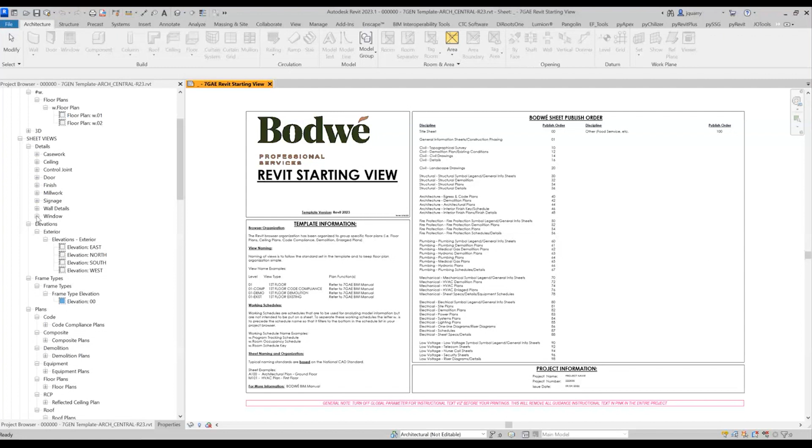A lot of these meetings are going to be based on what you guys want to see too. I don't want to sit up here and just monotonely dictate everything I'm trying to show you. I want you guys to interact, so if you have any questions, please jump in and ask.

I was just going to comment on that. Not you, Rick, though. Go ahead. I was just going to compliment you on how great this cover sheet looks. Well, then absolutely, please, take it back, Rick. He said he didn't want it. No, I'm serious, this already looks like a step in the right direction.

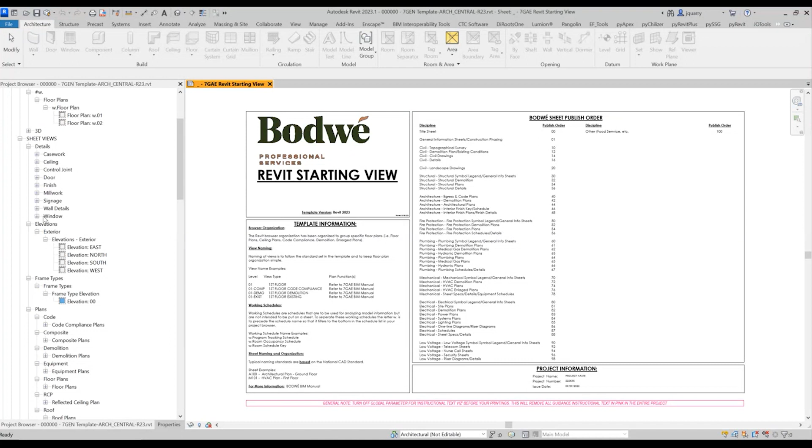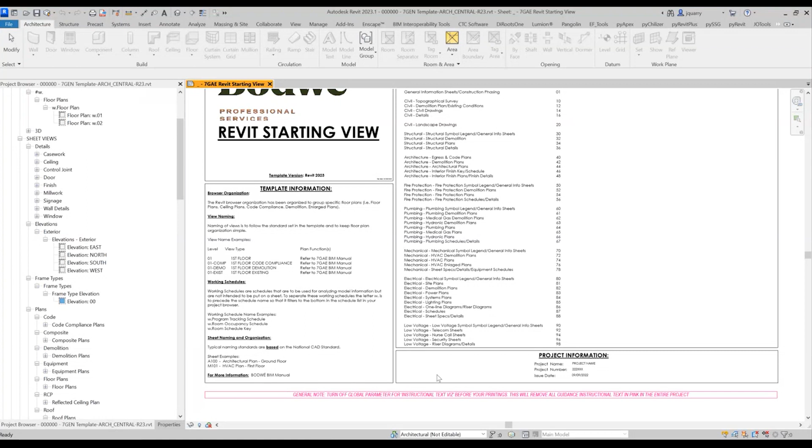Yeah, and this is a little bit of what we had before, just tweaked a little bit. You'll probably notice, Rick and everybody else, some of these pink instructional texts that I've tried to place throughout, and I'll continue to place throughout, to help people know what we're doing with what and where, to help facilitate that until you understand our process and how to achieve the graphic we're looking for. That comes in a little bit later, actually.

The global parameters, I can show everyone that. The preliminary stamp for the title blocks are also tied to that. So, you want to just pause for a second? Sure. Any questions? We don't have anything online yet, but anything from anybody?

So you'll see when you first get in here, some of you may have done this, some may not have noticed. There is what's called a browser organization. And if you right click any of these headers, which are listed as views, schedules, and sheets, you have this ability. You'll see in this project browser that you can actually edit these and control how it's sorting and displaying in the project browser.

The one thing I recommend is create your own if you need to help yourself move around. There's plenty of parameters here you can choose from to filter by, but please don't change the default one. This one is 7Gen, please don't change that. If you have to, create a new one, duplicate it, whatever you need to do, but that'll give you different looks.

What I mean by that is, let's say I'll pick this phase. I have no idea what's even in here, this was already in there before, but if I apply it, you'll see what it did is it changed how it's organized over here. This can be a very powerful tool to help you find what you're looking for as well. Recommendation: try to get used to this one, because it's going to be the default in every single project.

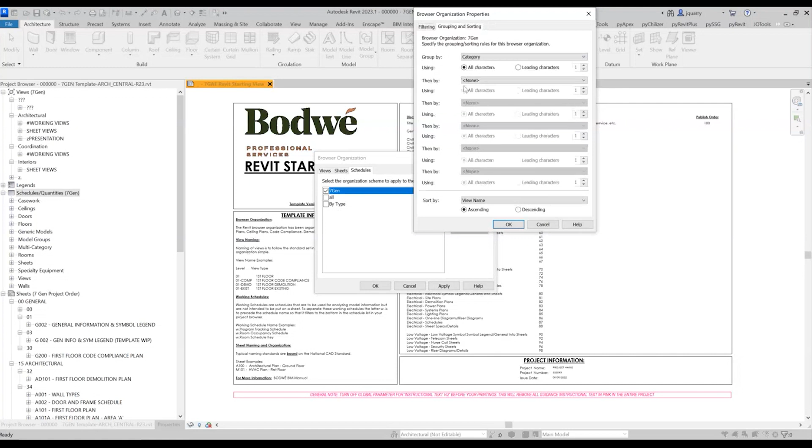So there's one for views, there's one for schedules. Notice there isn't one for legends. Rumor has it they may be bringing that at some point, but I don't know that for sure. But there are several settings you can do. You just right click it, go to project browser, sheets, your schedules, edit whatever one you want, go to the sorting and grouping, change however you want to do it, play around with it, create your own, have fun.

So that is the browser organization.

The other bigger part of this is you'll notice this working view and sheet view thing. Over the years I've implemented this in several firms, and it's always an issue to think of at first because nobody really thinks of it this way. But working views and sheet views, a brief history, are something that was necessary when Revit first started because they didn't have view templates.

So in order to keep drawing views safe—if people went in and changed doors to blue, turned off kitchen equipment, made all the walls hatched purple or whatever, just so they could see things a little easier—they would forget to go back and undo that. There wasn't a quick way to do that. So when it came to print time, they would go to print, and all that stuff would be purple and pink and all that good stuff, which is never good. So when view templates came around, it made these a little less necessary.

However, there are tools in here that allow us to temporarily turn things on and off, which is really nice—I use it on a daily basis. I'll do one of these focus trainings on that in the future. But I still like to use working views versus sheet views, so that way I know which ones I really shouldn't go in and mess with.

And if I know there's a set for sheet views, I know those views should be on a sheet. My working views are just views that I can do anything I want with the graphics. That's the only difference—they're the same as any other floor plan view. For instance, I can change the settings and graphic settings, and I don't have to hurt any of the plans as I'm doing it.

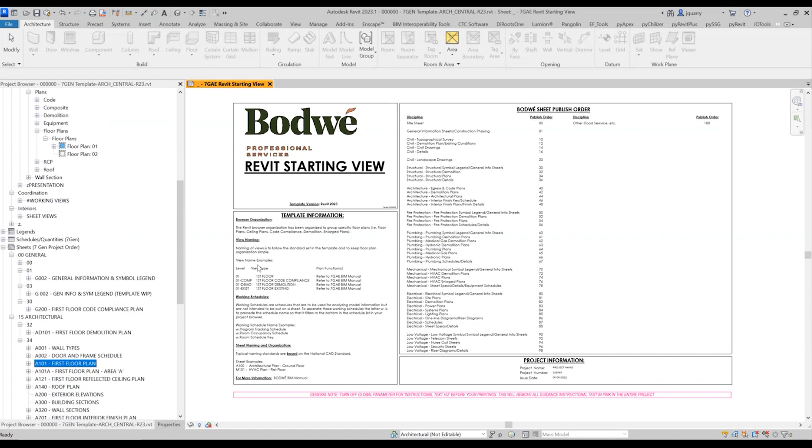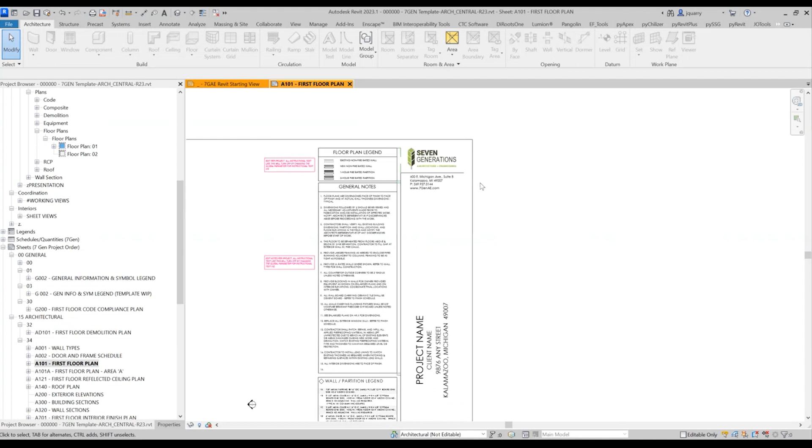So, moving on to the next one, sheet organization. Some of you have seen some of this already and have pulled out your hair, been extremely happy with it, all the above, right? I just wanted to point out a couple of things that have changed from a graphic points of view. For one, any of the sheets you see here in the project browser have been created already and had legends and notes already placed.

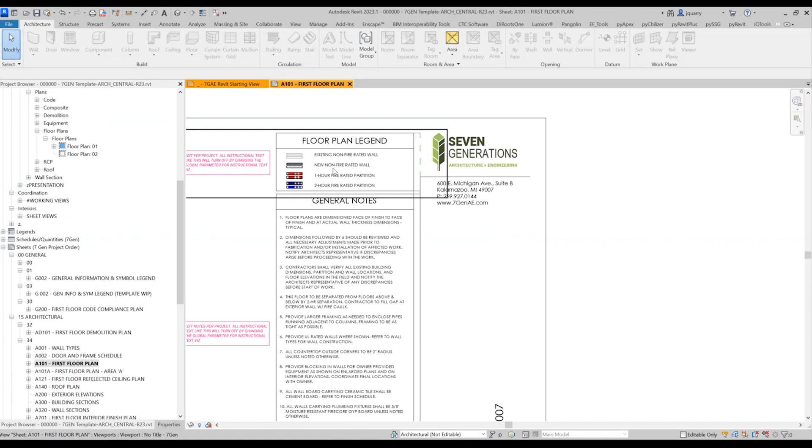And I'm in the process, and I haven't finished this all, but I'm also putting in some reference planes. The reason I'm doing that is it's going to allow you to quickly place another legend, not necessarily from one plan to another, but I know if I bring this guy in, I know this point goes right there, and now it's put in the exact space where it should be.

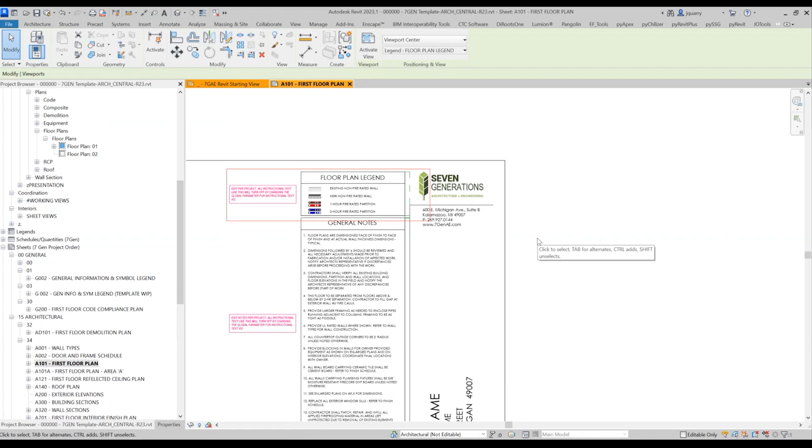And for awareness, those reference planes are set up to not print. Don't delete them, just place it on your sheet and keep moving. And if you don't want to see them, you can double click in it and hit VV, visibility graphics, and turn them off. If they're bugging you, I can turn off both of those and you'll see they'll go away, but they won't print.

Jason, does that change the setting for you specifically, or for everyone in the model? Everyone in the model. Yep, that's a view type visibility graphic, so whenever you hit the VV or the VG, you're affecting that view for everyone. If you work on a view template, same thing goes, you're working on that for everyone. So that's why you want to be careful with the new ones.

As you mentioned, we'll do a focus training on temporary views versus turning things on and off in the view template. Ideally, you're never doing that - it's set up to print exactly how we want things to look. I'd say if you're not comfortable using the temp tools, turn off the view template, turn it back on. But working with Jason and going through the temp views has worked great for me.

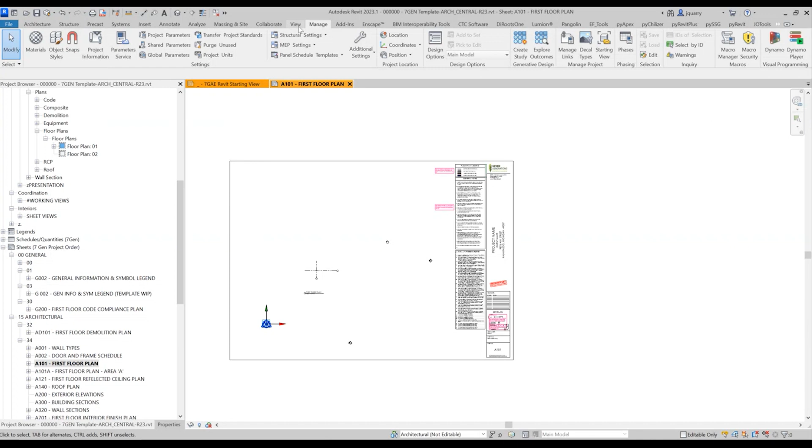All right, so the next thing, the view templates, I want to show you guys how those have changed, at least from a naming standpoint. Let's see if I can find them here. View templates, manage. So you'll notice it's quite a bit shorter list.

Doesn't mean we can't add. Doesn't mean we're okay with everything that's there. I can definitely guarantee not all the line weights have been gone through yet. It's a process, so it'll take some time to get through that, but I'm working diligently on that. But these are pretty self-explanatory.

I mean, building sections, it's going to put your building section graphics where they should be. It's going to turn things on and off the way they should, with a huge caveat of links - that's a whole separate topic. But it will set everything up, at least from a benchmark standpoint.

The other thing it does is it also places any new views you create in the proper location over here in your project browser. So that's super important. You'll also notice when we look at the drawing sheet list, it'll do that with your sheets, your placeholders as well. So there's no more guessing as to where did that go. You know exactly where it's going to go, once you get used to it, I should say.

So the view templates are a big deal, very important. And feel free to add some to them.

I would highly suggest you put your initials in front of a view if it's a working one. I like to use W dot. You might see some of these in here—ones I've created over the years to help with applying view templates and temporary view settings, so I can quickly look at something and then turn it off. They become very helpful in that regard.

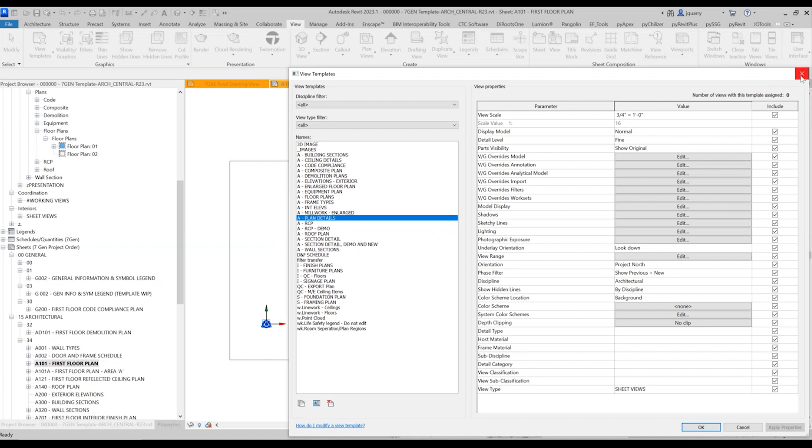Again, we'll deep dive into that a little bit further later.

All right, the next thing I have is publish order numbering. This is a good one. I went through and looked through this list, made a lot of sense. The publish order, even though I haven't used it in the past the way we use it now, it does make sense, and I used a very similar approach previously with prior employers.

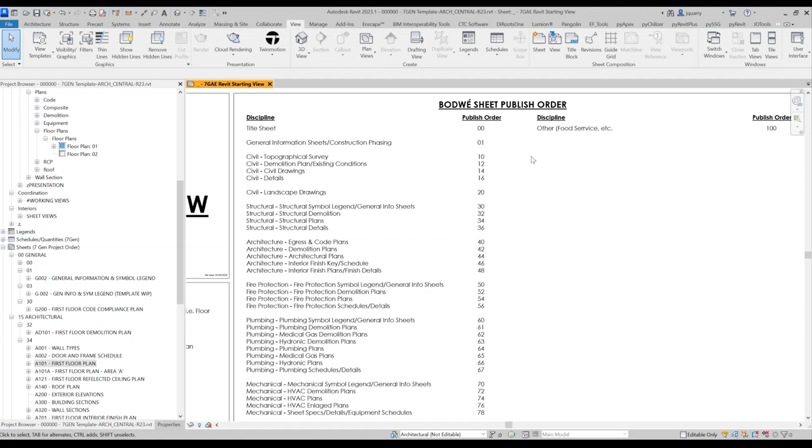But this is important so we can make sure the sheet listings in the drawing master list and on our cover sheets are appropriately ordered. You'll notice it's not all encompassing, but it's pretty clear—structurals are in the 30 series, civils in the 10 series. This is important for Steelhead as well, so you understand how this goes.

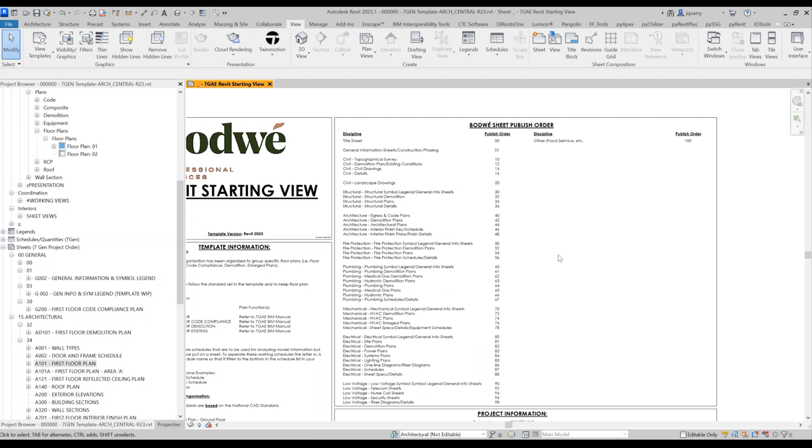This is something Howard and I are going to work on next week to get updated into yours. We have low voltage shown, and we also have an additional category called other. That's why this is widened a little bit—food service and any kind of for-reference-only type sheets will reside there.

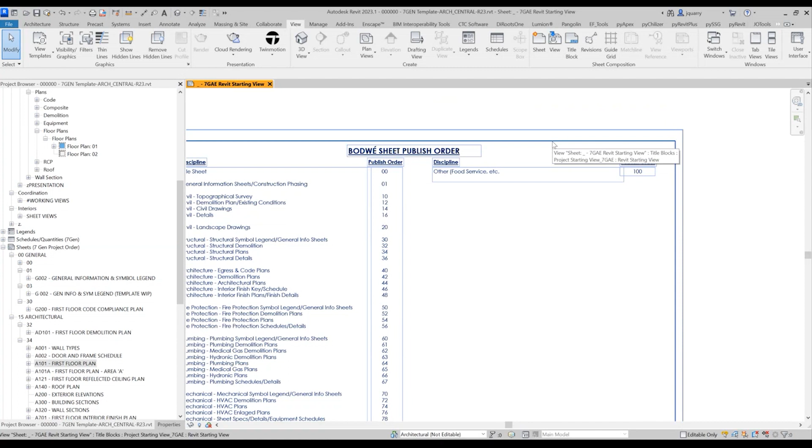So to show you where that is, I'm going to go to the drawing sheets master list. You may or may not have seen this.

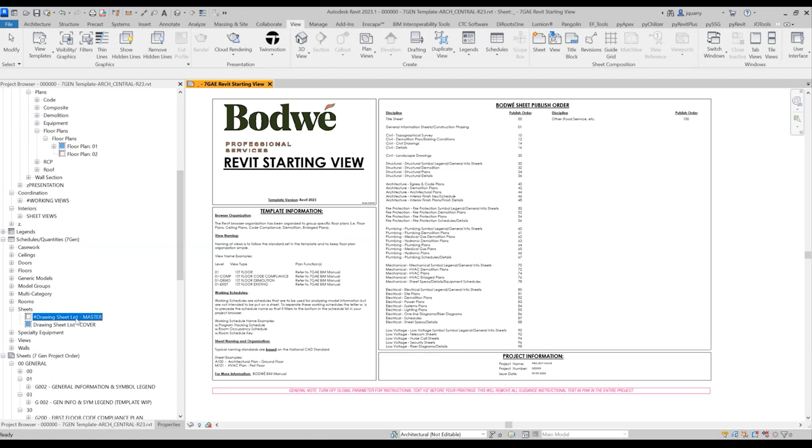Something I've thought about doing is coloring some of these other things, and I've thought about removing some of these columns. Ultimately it's come down to just leaving it as it is, because I don't know from one project to another how complicated it's going to be.

Take Many Farms, for instance—it has several volumes, and I'm limited as to how many filters I can run. I can only run 4 filters on a view setting.

Once you add the volume number and the building name in there so they properly order on the main cover sheet, it limits you to 2 other parameters.

Hopefully—I know I've been hitting the Revit Ideas board—if you haven't seen it, go there, look up some of these things, you can vote on them. That's the only way Autodesk even updates their roadmap anymore. Not a lot of people know that, but they do pay attention to it. There is a roadmap too, so you can go look at that to see what kind of features are coming down the line.

But this is pretty important. I know the status quo before was using the revision schedule, and I want to say out loud to everybody, that's bad—don't ever do that. If you see that in a model, please let me know, because that's going to affect post-bid project CA. Absolutely, yes.

So the revision schedule—I use it for alternates as well, or not alternates, but revisions of either bulletins, which we don't call them bulletins anymore, CCDs, addendums, ASIs—any of those after-contract bid document releases, we have to legally keep track of that stuff. So you'll see the bubbles, right—I'm sure people can see me on the screen—bubbles with the tag in it.

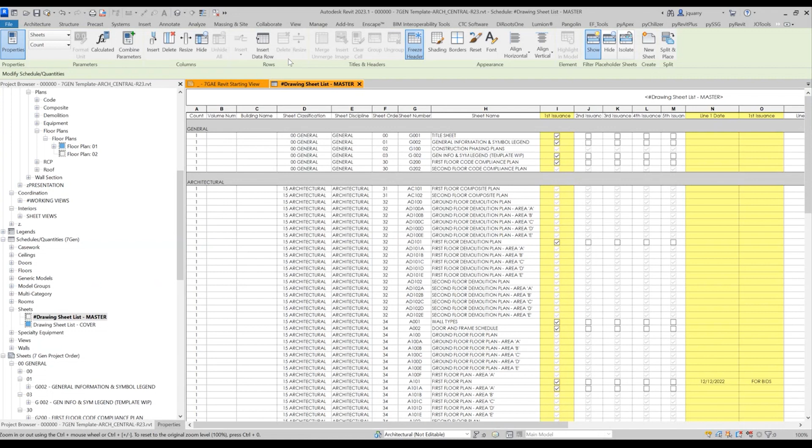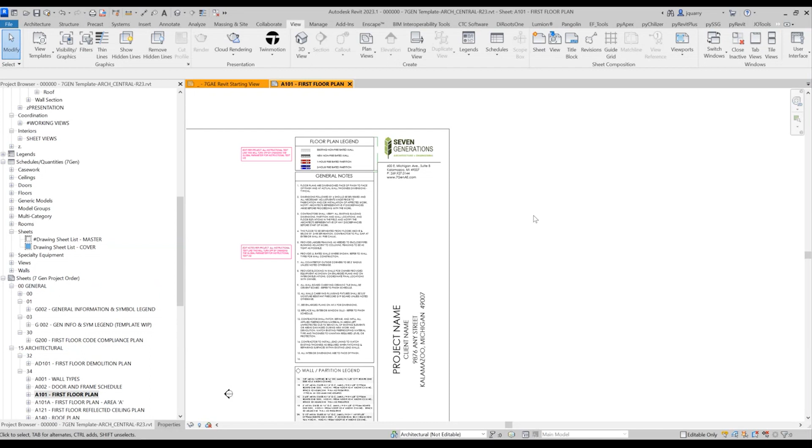So the other big part to the sheets that I wanted to show, some people have seen it, some have not, is all Bodwé companies have their logos preloaded into this title block. It also resides in not just the 7-gen title block, which I will rename to Bodwé at some point, but it also resides in the IHS, the BIA, and ultimately the VA ones, because those are provided to us, so I haven't gotten into those to update them. But the cool thing about it is it makes it super easy for anybody to use this title block as their title block.

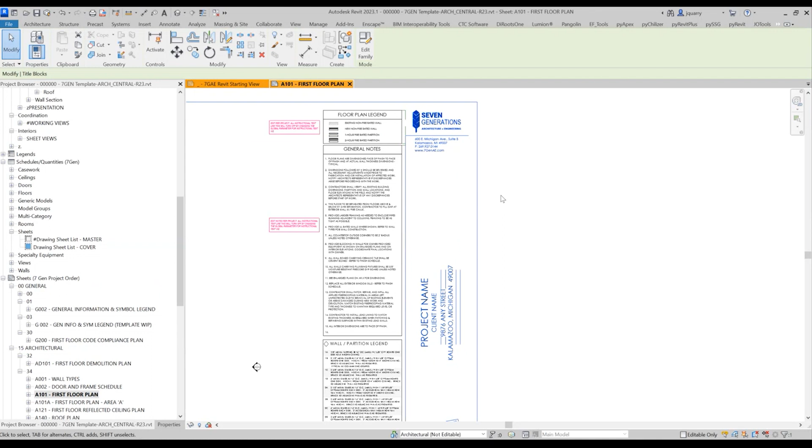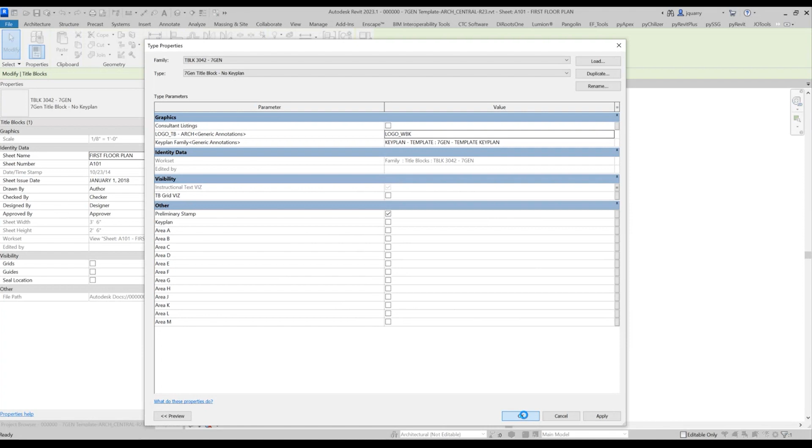So a real quick demonstration, I can go in here and look at if this project was something that, let's say it was a Steelhead project, and I wanted to show the particular logo at the top for them. I could normally go in here and pick it. Of course, it's not loaded, so I'm going to use WBK, which I should have started with. But when I hit OK, you'll see that WBK's logo is at the top, and their address is there as well.

This is quite a bit different than having to just stick an image in the model, in the sheets, and hope that it looks good and that it's placed in the same place every other time in every other project. 99.9% of the time it's not.

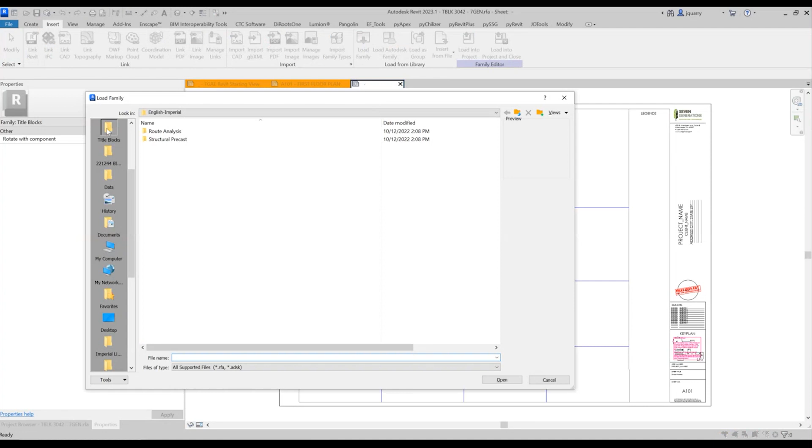Well, and to go with that too, Jason, blurring the lines of the companies, there's going to be projects led by Steelhead, there's going to be projects led by WBK as the prime, so it just makes it more flexible for us as we're modeling.

WBK will never work in Revit. Correct. Well, don't ever say never, but never at the moment. So, but all the companies' ones will be in here.

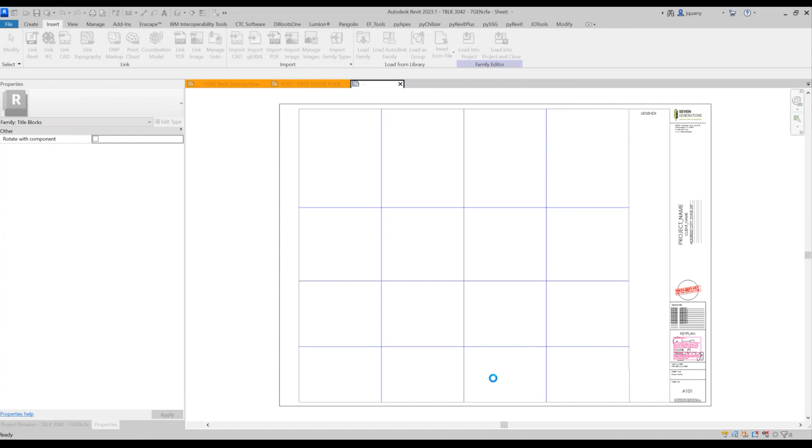Steelhead, Blue Stars, you name it. I'm not sure why, I must have accidentally purged them out, so I'll stick them back in here. Save this really quick.

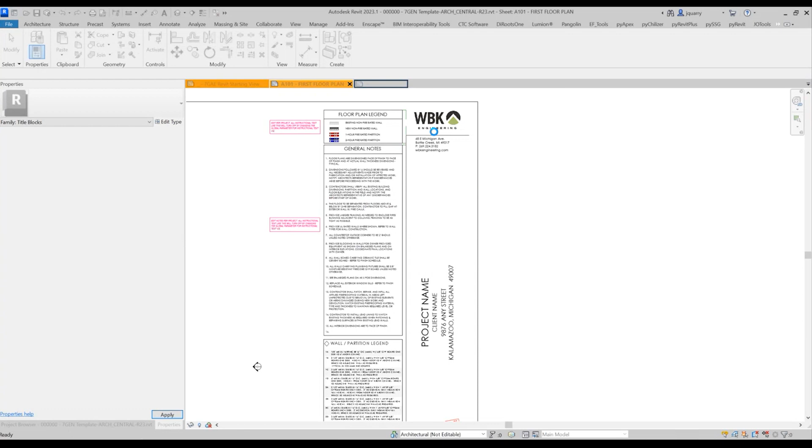And they'll be available. Also, in the BIA one, in the Bodeway one, they're not quite loaded yet, but in the BIA title block, which is actually loaded in here as well, you'll see that there's numerous places to put several of them. And these are only meant for Bodeway companies.

This isn't meant for if you have Salis O'Brien on your project. They're going to put their own logo on their own drawings. We shouldn't be putting their logo on any of our drawings. But it acts the same way.

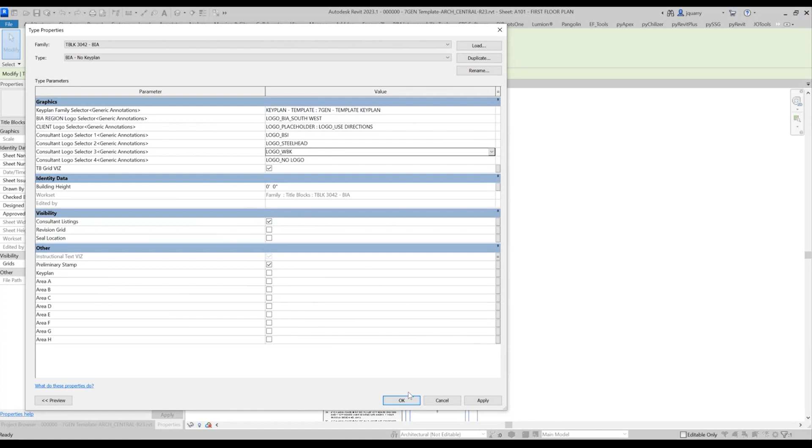So if I go to edit the actual family, I can go in and say, okay, well, the first consultant is going to be, let's put in Blue Star. For the second one, we're going to put in, in fact, let's just put them all in. Put WBK and do all that. Here we go. So you can see now everybody's logos inside your title block, super quick and easy.

And you can change the order, you can do all kinds of stuff, and it's all pre-programmed in. So this, again, in the idea of efficiency, we want to keep you focused more on design, detail, the project itself, and less on the documentation part of it in this respect. Because you can imagine if you had to place all these images in the same location every single time, it's not fun. So that's the whole intent there.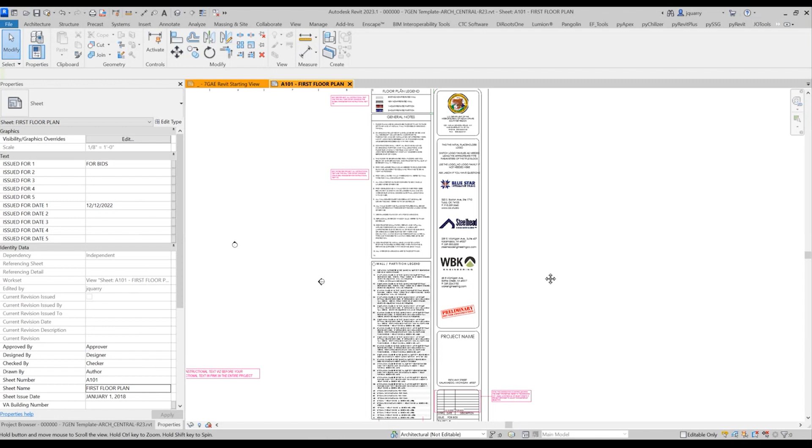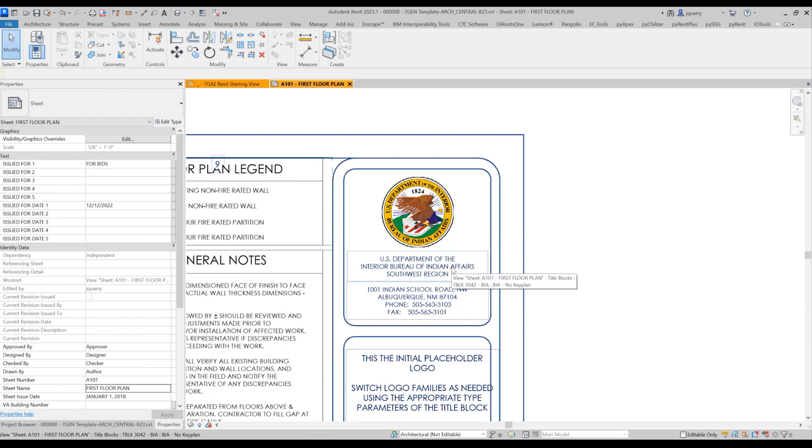This one also actually has the BIA Southwest region. It also has Grand Prairie region, I believe, Great Plains, that's what it is. And I'm planning on adding others as we work in them, but we can switch those out as well.

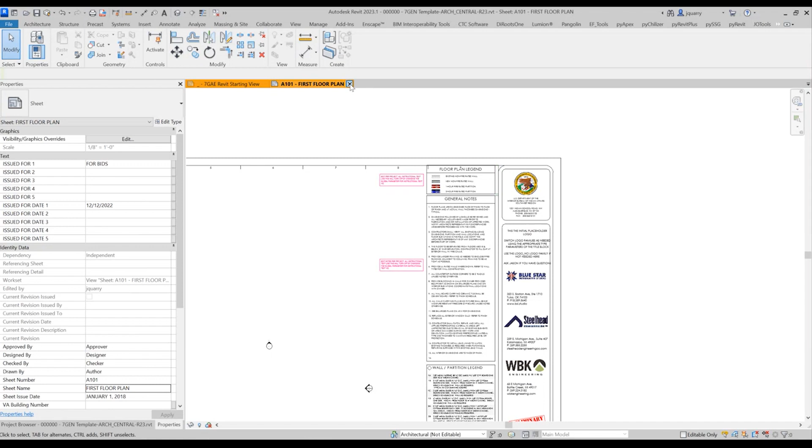The VA title blocks setup is different than this one. I haven't done the VA ones yet because those are given to us to use since they're theirs. You pull it from the TIL, but every time we pull it, we'd have to make sure it hasn't changed. Hopefully their revision numbers and dates are accurate, but I will do one for sure and get it in there. I just haven't found a good VA one yet to start on, and Eric wants it on his.

So yeah, we can do it on that, sure. I can easily incorporate it.

Not to jump ahead, but one thing we want to note: don't save over families on the network. If you need modifications, coordinate with Jason in the discussion, but don't save it back to the network. You'll overwrite existing parameters if you do that.

I'm going to try to move it along here a little bit. I'm kind of running behind on my own time schedule.

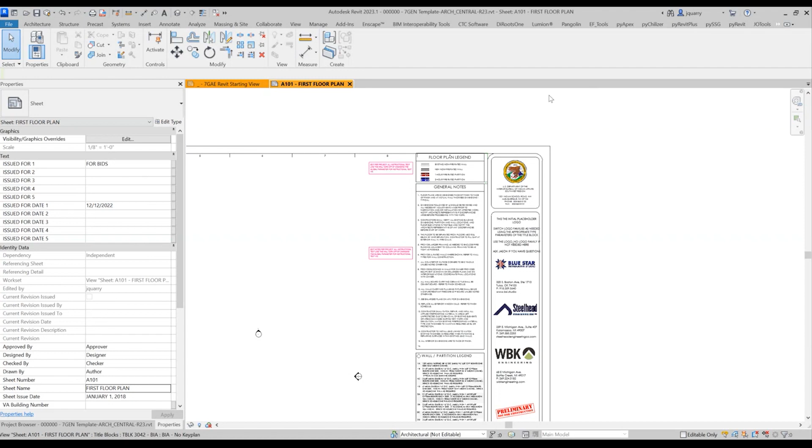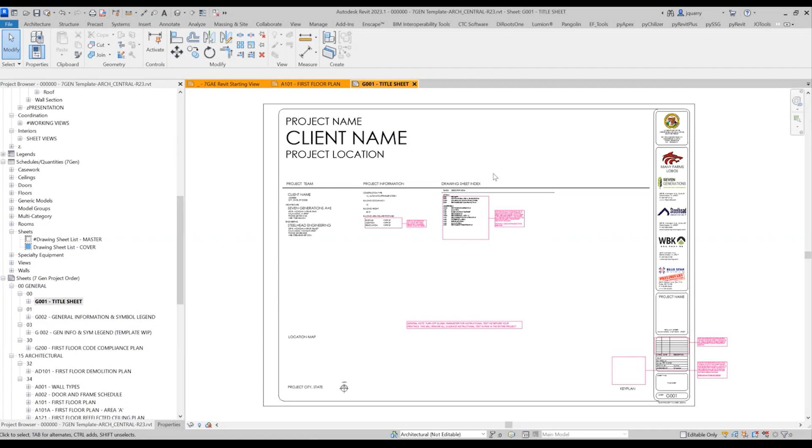Another really helpful thing we'll dig into is add-ins. Everybody should have certain add-ins, and I'm going to double check that's happening. This is something about Revit that isn't native, and I don't understand why, but there are several add-ins that support our Excel-Revit bidirectional transferring.

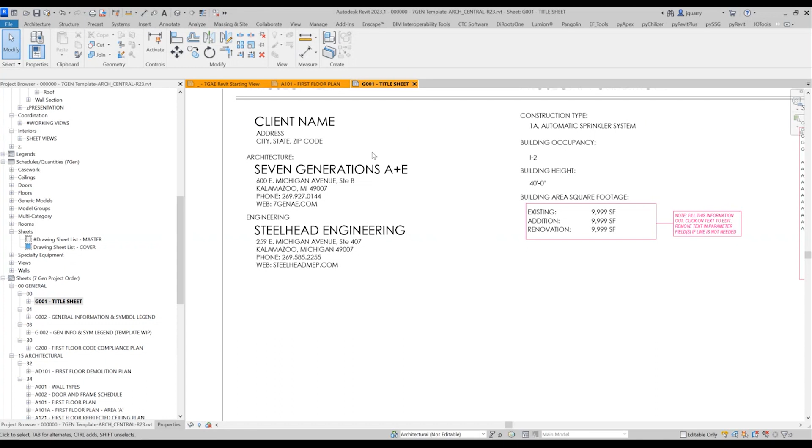One I use that everyone should have is DiRoots. It allows you to have pre-set-up Excel sheets you can load into your project and fill out parameters. In this case I've got about 12 spots for different consultants, and instead of hand typing these all out, I have an Excel sheet I can place into another sheet in the order I want, hit apply, and it applies to the sheet and I'm done. Much quicker than trying to find the address and find this and find that.

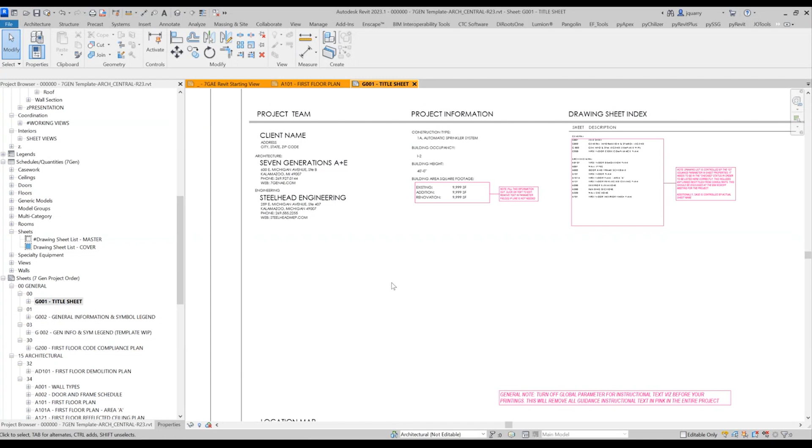That is going to be a deep dive with our add-ins, one of the very first ones we're going to do, actually. So stay tuned for that.

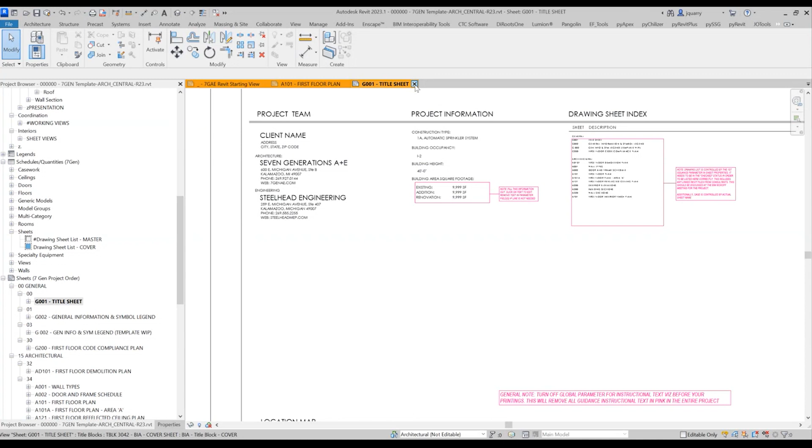All right, let's see where am I at here. All right, wall types—everyone's favorite topic recently. Wall types have been changed. Of course I'm a little biased, but I think they're a bit simpler to follow.

Mainly because they're numbered now and not specifically named with metal stud or CH stud by itself in front, so they don't accidentally get used. Each type now has its own number, and it's not 100% complete. Recently we've determined STC ratings need to be included, as well as wood stud, which I should have realized—that's on me. We have a couple projects right now we're going to institute that on, and then I'll get them copied over, so we'll have that in here very soon. But you'll notice a couple things.

Easily 1A—this is good for Steelhead too, so they know what's what when they start seeing it. Whether it's one-sided gyp or two-sided gyp, that's pretty much what the number stands for. The very first few: 1 is one-sided gyp, A is the stud framing or furring framing size, and they'll tag just like this. So in a project, when you bring in a wall type, it automatically displays in a schedule on the floor plan under your partition types with the description of exactly what wall type it is.

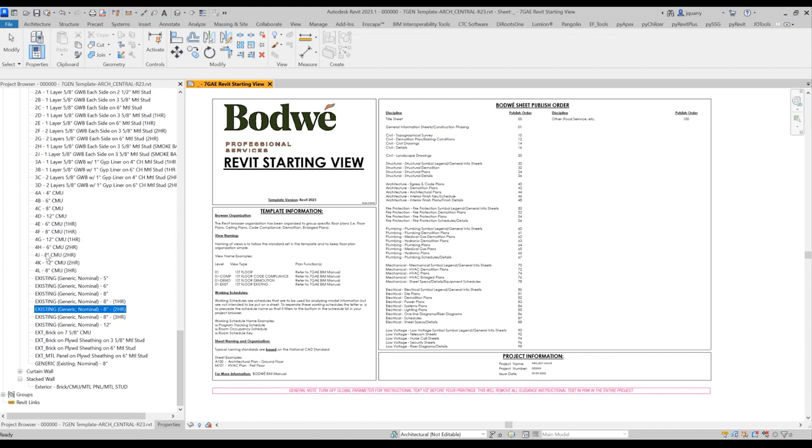There's no... yeah, and the only other thing I'll add to that too is as you're modeling, and I don't necessarily have, well, maybe I do have an example of that I can show.

As you're modeling, I've noticed this a few times lately. You want to be careful when modeling these things, especially rated walls. What usually happens is if somebody's inputting an existing condition and drawing a wall the entire length of the building to create that corridor wall, it's fine. But they later apply that this is a rated wall. Let's say there's a vestibule here - this portion of the wall doesn't need to be rated, nor do we want to show it as that. So you'd want to cut that wall, break it, make this portion the regular type without a rating, and the rest of it rated. We have to be careful of that.

Because that's exactly what BIM is for - to basically virtually create your building to see if it works. We're trying to eliminate errors and omissions, get rid of as many RFIs as we can, and make the project as successful as possible for not only us but for the owner, the CM, and everybody else involved. So we just want to be accurate. It seems like tedious work, but it's necessary work.

If your model goes out to somebody else, ideally they're happy with what they're getting, like 'oh hey, this firm did this right, their models we can count on being accurate.' But you'll get what I call BIM arrogant at some point - you'll get models from someone and think 'oh my gosh, they didn't know what in the world they were doing.' It happens way more than you think.

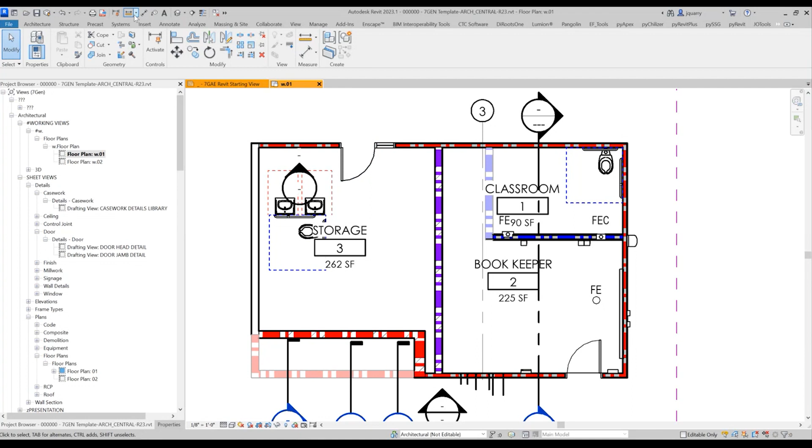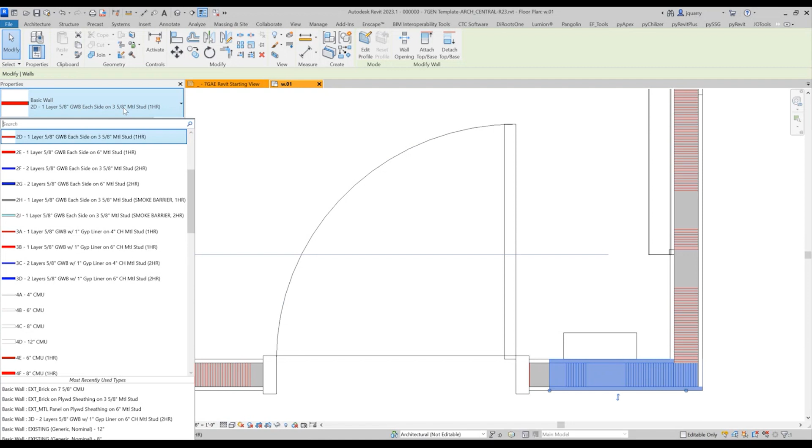So I can show you that actually real quick. What I would do is use this break command. Come down here - in fact, turn on thin lines, you hear me say that to everybody. But let's just say it's right there. Change that - we know that this is rated. So I would just change it to a 1-layer 5/8 inch, 3 5/8 inch metal stud.

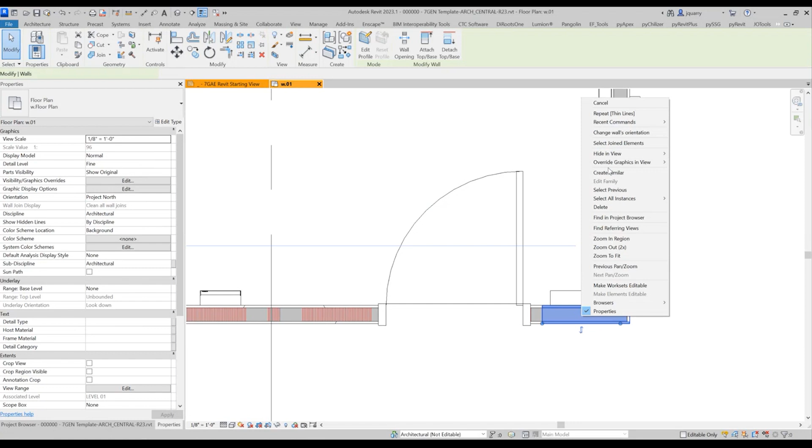Actually I changed that to the wrong one - I changed it to a 1, it should be a 2, sorry, because it's double-sided. But that right there, and you can make it join - either way it's no big deal, but that's the simple quick way to do it. And then I would have, if this wall was actually continuing down this way, if I can actually draw it the right way.

And it's good to see the red in all our plans, right? Yes, fire. The only time that won't be applicable is if we have an STC plan, like we're doing for Many Farms. Then the fire ratings, correct me if I'm wrong Jason, would be turned off, and you would see just your STC highlighted walls.

Technically, MEP is probably going to like the fact that things are split up, because now they don't have to read text to go back and forth. They can graphically see, oh, this is an STC wall, I need dampening in it, or this is a fire rated wall, I need fire dampers in it. It makes it much easier for us to coordinate together.

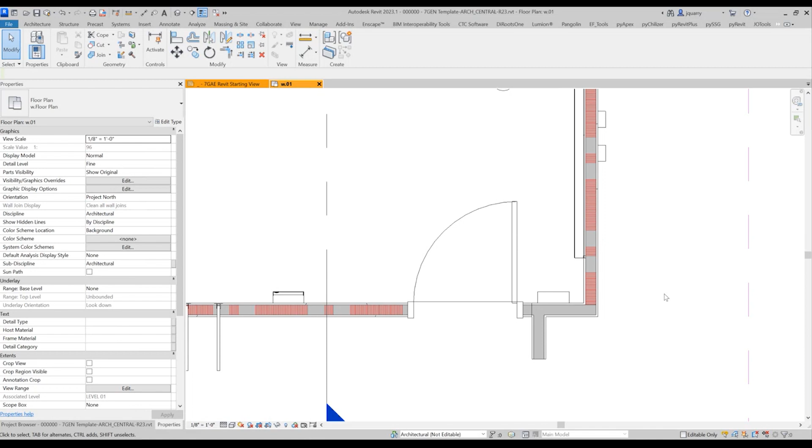One thing to add, back to Nadine's question about existing conditions: if your existing wall assembly is staying and you're renovating a space and putting new walls in, you want to know the face-to-face dimension, so you understand how much space you have within a room-to-room dimension, and can identify clearance issues like ADA. The guts of that wall don't matter so much.

If you're putting an addition on an existing building, the most important thing isn't necessarily what it looks like in plan, it's what it looks like in section—either cross section in plan or a transverse wall section. So when doing renovation projects, I typically ask: what's the existing condition, where is it drawn? If it's not drawn in your model, it's hard to know how to stitch your addition to that existing building. Wall sections are super important.

They don't have to be 3D modeled. They're illustrations that help you solve the problem. So the sooner you can get into it, especially for a renovation or addition to an existing building, cut those existing wall sections in schematic design.

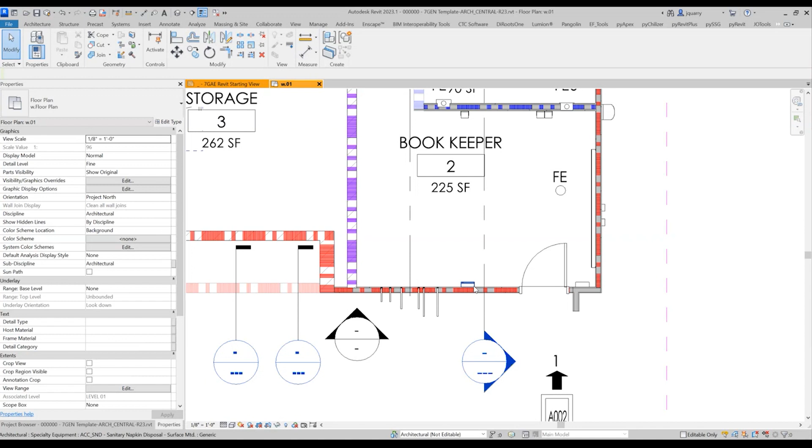So, plan views, scope boxes. Scope boxes are huge. You may or may not have started using these. If I am an MEP consultant, Steelhead, they would love to see these because they can automatically set up a lot of sheets very quickly. They're preset. Right now there's one in here currently called overall building that you can resize, and there's three unit ones. And we can always duplicate them.

But if you have unit A, unit B, unit C, you can place these with the exact crop region area you want to see on a plan, and you can tell MEP, you guys can copy and paste them, run a Dynamo script, wherever you want to get them out, but you can reuse them. And all their sheets, all their views will be cropped in the same exact way that yours are. So it provides some consistency with efficiency built in.

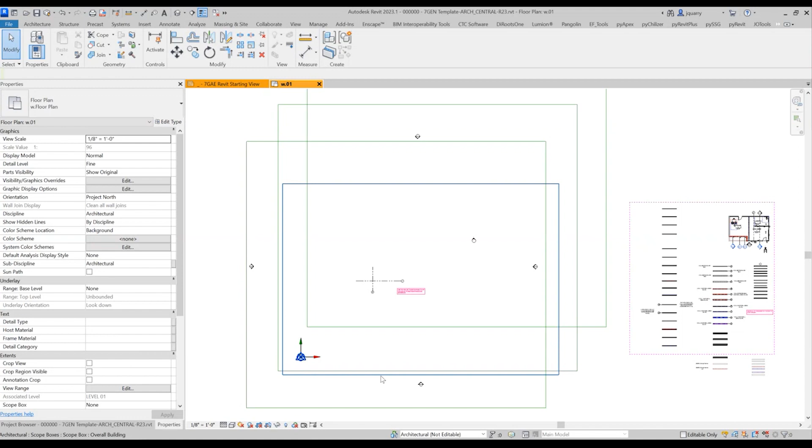Along with that, guide grids. Some of you may or may not have worked with guide grids before and messed with them lately. Guide grids are meant to be the same kind of help for you. And there's several of them preset. I have an A, a B, a C, a D, an E, an F, G, and H. So that should get us through most projects. If you need to add more, I can always show you how to add more.

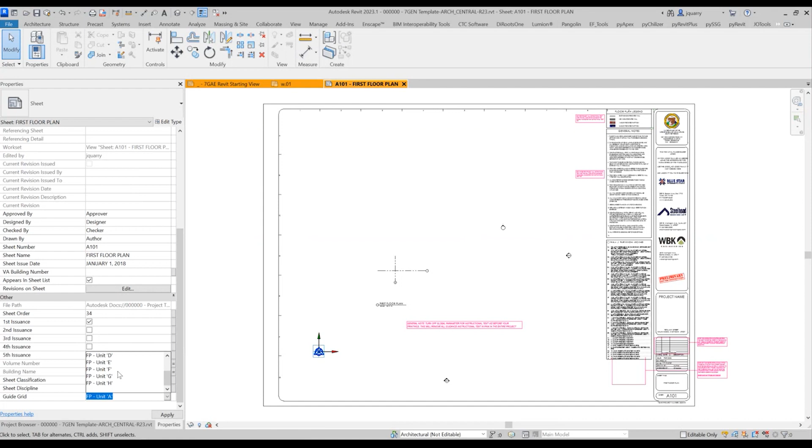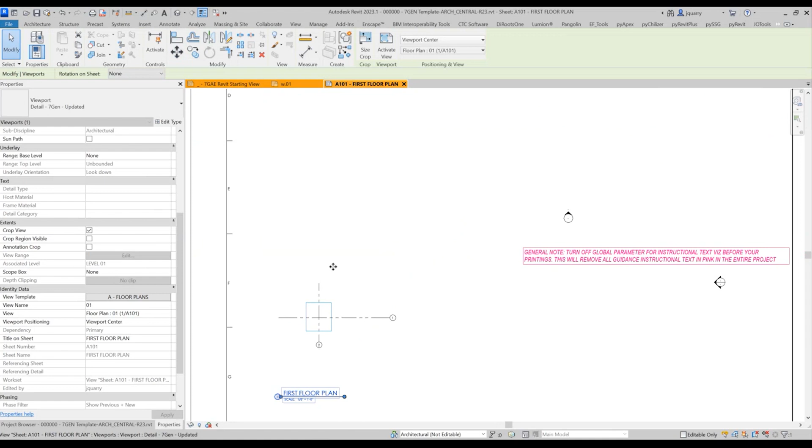But what it allows you to do is place views in the same exact location on every sheet. So if I have a unit A and it's going to be right in this location, I can move this from the intersection of the columns to the intersection of that and tell everybody that's where the guide grid is. And they can then place all their views in the same spot. So when you're flipping through a set, that view does not move all over the place. It's the same everywhere. Seems simple.

Some people have used reference planes in the past. I can tell you, I've used guide grids. It seems kind of like a hassle at first, but once you get to use them, it's wonderful. There are some caveats to it that I don't like. However, most of you probably won't run into some of this stuff because it's more setup-related.

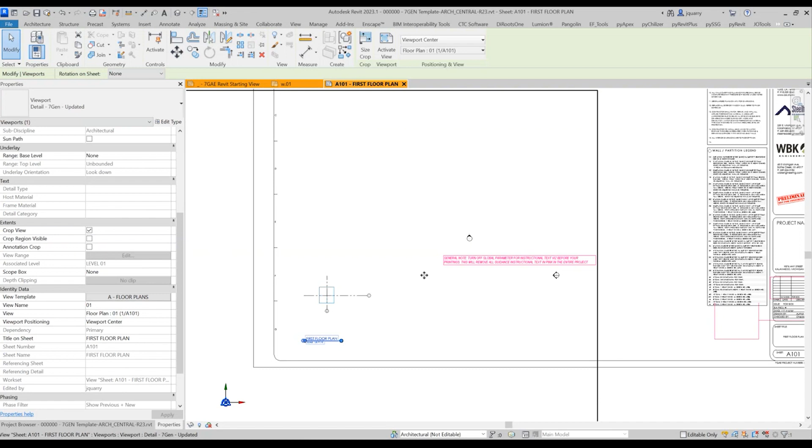But it only recognizes two types of element on the sheet to move around. Like you noticed when I did that, it actually snapped to the intersection of the grid, of the column grid. So column grids is one of them. The other one happens to be reference planes, which it never used to be, but now it is. So you can use reference planes as well.

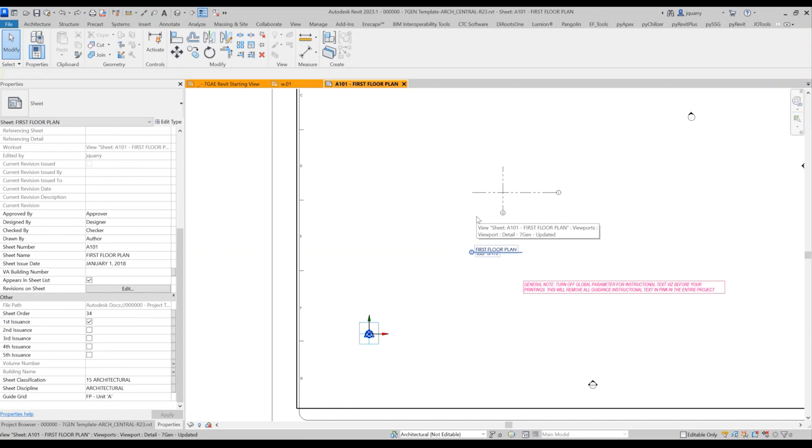I will say, if you can use a grid, it's better because you can just tell somebody, hey, use grid 1B or 2Z or 2.2X or whatever it is as your base, and they'll know exactly where they got to go. With a reference plane, it's a little bit more difficult. They've got to copy the reference plane in, make sure it's in the right spot, all that good stuff. So use those when you can. Again, we'll dive deeper into that one, but that's something a little bit newer too that most people haven't been using.

Guide grids, we did that. Gosh, I'm actually back on time now, believe it or not.

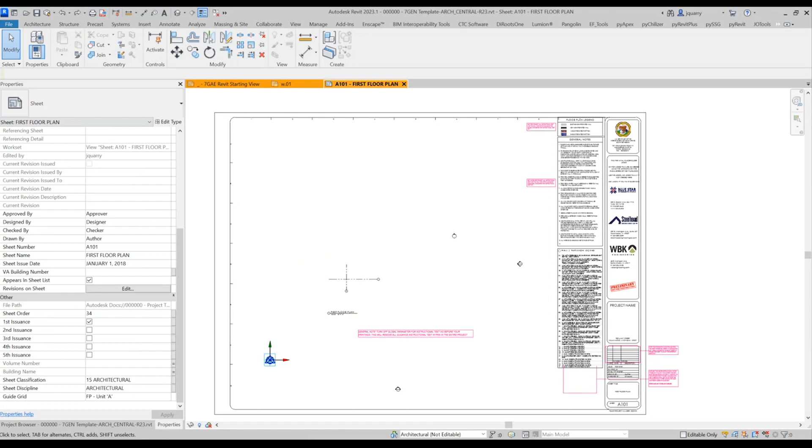All right, so the next section I focused on was, what do you guys want to see for future focus trainings? Any suggestions? Eric, I'll ask you to jot any down that come up, if any, maybe, or somebody. I don't really care who, but.

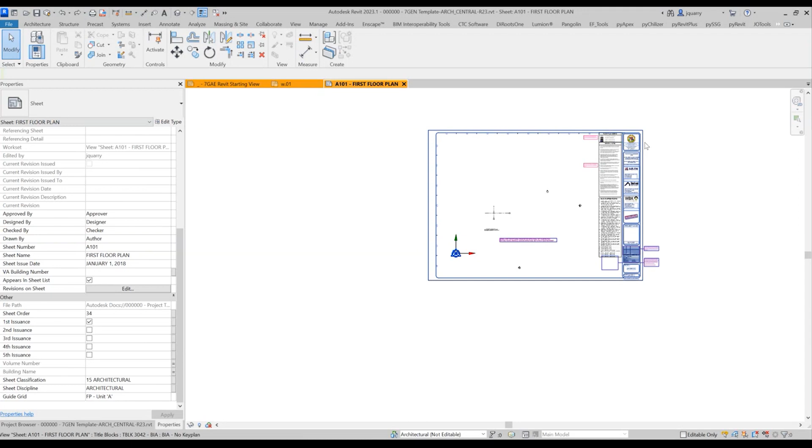Keep in mind this is kind of where we break away from what we call the mandatory MEP/architectural group. MEP, you're more than welcome, Steelhead, you're more than welcome to attend these just to kind of know. Even have them on in the background if you want, but it's not necessarily a mandatory part.

Some of the things we will be digging deeper into: families, how to build them, how to edit them, doors, casework, equipment, wall types. We're going to dig really deep into those. Talking about the location lines, we kind of touched on this a couple weeks ago, and we have a video up on that. Don't forget to talk about the videos, by the way.

Location lines, ratings, those kinds of things.

We'll get deep down into modeling windows, the process I use to model windows, and the grouping and placing of them so that if they change, they all change at once.

Laser scanning, best practices, dimensioning, keynotes, how to use the keynote system.

This is going to be really important for wall sections. You're not going to believe how fast you can do a wall section once you learn how to do this. You'll also have a lot of confidence knowing it was done right, and the nomenclature hopefully matches your spec, which makes that process a lot better.

Things like gypsum board, you won't have a numerous array of ways to spell and abbreviate them. It'll be consistent across the board.

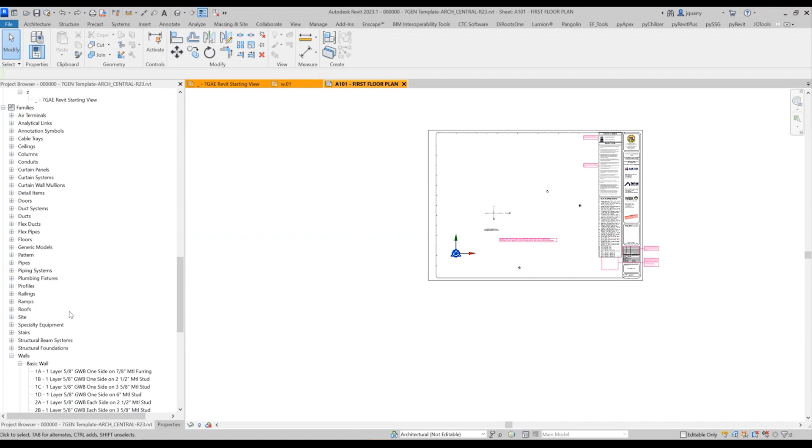I don't know that Steelhead has any of these necessarily. I think they do, but I don't think they name them the same way to help with quantities and things like that. But for instance, let's look at, I think I had a walls one in here. Yeah, so there's a wall material takeoff that I created a long time ago.

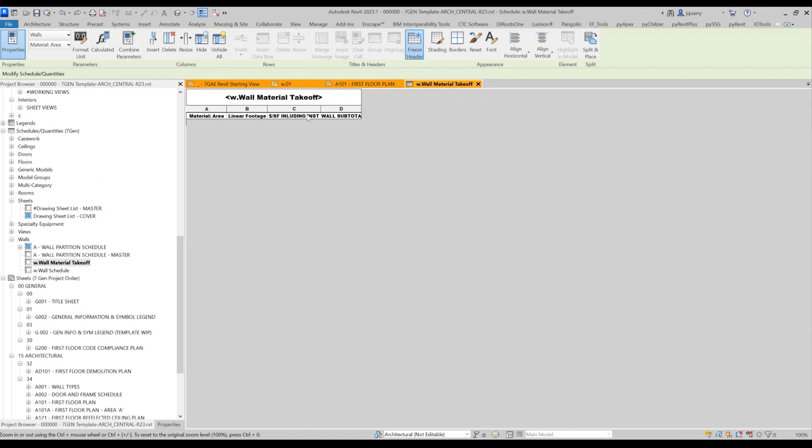You don't see anything in here because I haven't updated it, but this will give me an area of the material, a linear footage, a square foot including install. So there are some parameters you can fill out with costs, and it can give you roundabout costs.

Keep in mind, the point of this isn't for you to throw this on a sheet. We don't want to quantify anything on our sheets, ever. The minute we do that, we open ourselves up to a whole slew of problems. We want the contractors to be diligent and do their own quantity takeoffs.

But this will allow us to double check whether our estimator is even close. I think of everything as a downstream use, and at some point, someday, we're going to get to where everybody uses the Revit model to do estimating, not necessarily us, but working in an IPD environment with a CM or whatever the case may be.

That'll come at some point. I try to anticipate that when I'm creating these types of Revit standards, because I know I've used some of them in the past with some highly sophisticated CMs. Most CMs in the area aren't that sophisticated, so you may not use them. But the good thing is you can have the tools at your fingertips to double check things.

And to verify. If you get an estimate that says you have 4,500 square feet of gyp, and darn well there's at least 12, because you can come in and look at a quick schedule real quick and know what was modeled. Then there's a conversation you can have, where you can say, no, I think you're off. And then you can have that argument, but at least you catch it at that point and not necessarily in the end when it actually truly matters, when money has to exchange hands.

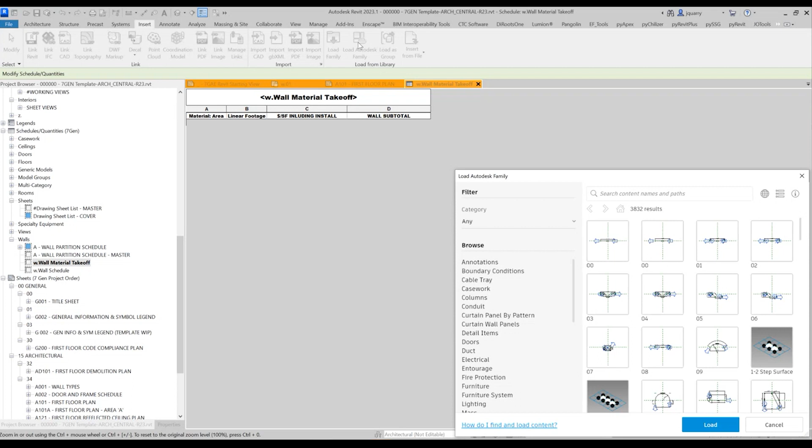If you don't find it there, maybe do a search through Autodesk's website, or through the add-in here, which I can show really quick. They just introduced this a couple releases ago, but there's this Load Autodesk Family. What's nice about this is instead of everybody having the generic out-of-the-box families installed directly to their machine or to a server location, it's all in the cloud now, which is huge.

I'm hoping someday that we can, as a customer of Autodesk, upload our libraries up here, so we can get this nice little search all-in-one kind of thumbnail graphic to see and all that. It'd be really helpful. This is something Revit has lacked for quite a few years. Early on in the 8.1 version, I think they had something, but for whatever reason it was taken out. There's a lot of plugins and add-ins that third parties have made a lot of money on for content management.

I've used them, I've tried using them all. There isn't one that's great. Or if it is great, it costs way too much and doesn't seem like it's worth it. So hopefully someday they'll bring this in. But you can do a search just like you can in Windows.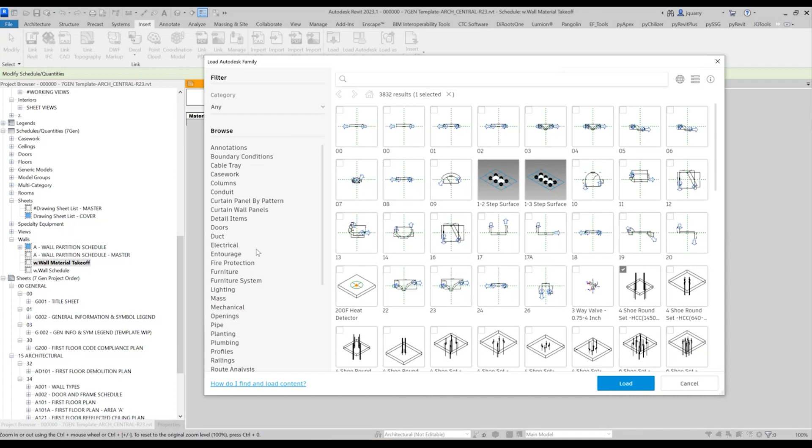You know, I use this all the time, like detail components. If I'm looking for like wood - give me something to look up here, I guess - wood fastenings or something. I know I can go right in here to the assembly code and find it. Oh yeah, there's a lag screw. That's what I needed, and load it.

In fact, we don't model anything over 350 at the very most, unless we're getting paid a lot of money to do so, because when you get into those upper LODs, it's pretty stringent on what it needs to look like. It needs to look exactly like it is, and nobody wants to pay the money to do that.

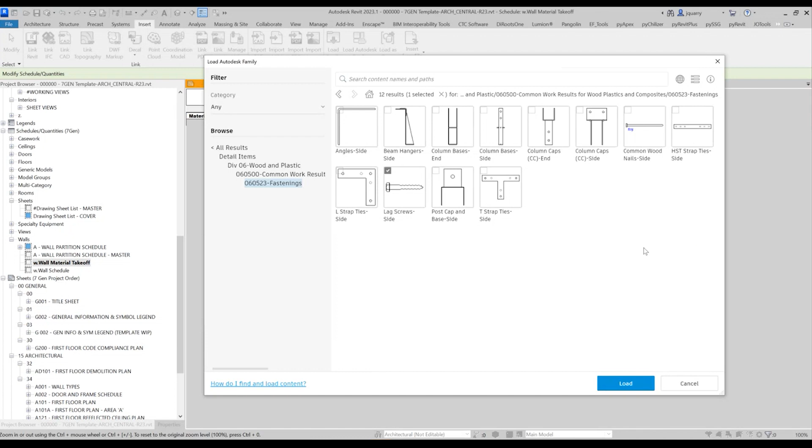Oh, this is a big one. We'll also go through the BIM 360 project archival process. There is no need, although you can still, there's no need to download models and place them on the server for backups, okay? We have an unlimited amount of space through BIM 360. We pay a lot of money to be able to have that access. We might as well use it.

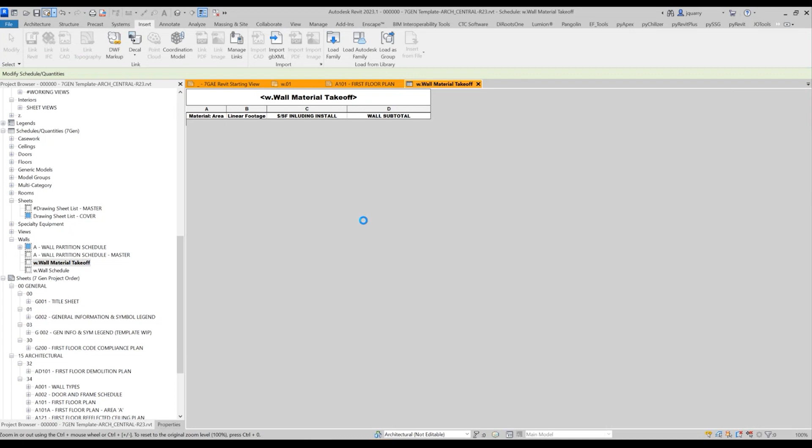There is a proper way that you can ensure that you can find a backup of any kind at any time, and we'll be going through that as well. Some people have already shown this too, but just know that if you know about this tool, this is pretty much 90% of it. When you go to Save to Central, you can use this comment section. That's what it's all about. Because if you put in here '100% SD backup,' then I can find that super quick and easy.

I don't remember which project I did this for recently, I'd show that too, but it might take me longer to find it. When you go into the actual home menu and come over, you can pick this and go to version history. You would see that comment right here and you would know right away, that is my backup and I can download it at any time.

As you can see here, this model has been saved 503 times. That's how many times this model's been synced. Of course, this is mine, probably wasn't the greatest example to show, but this is a template file. But you can check all this stuff with your projects as well.

And you'd recommend doing that comment towards the end of the phase? I would. I mean, you can use it any time, but it's really important for that SD, DD, CD, 50%, whatever. If you want to archive something, make sure you can go back to it. Again, like I said, the models are living and breathing. So once you're out of DD and you make a mark for CD, it's no longer a DD model anymore, right?

One caveat to that, with the VA, they may have requirements that they want a Revit model at every submission. In that event, you have to download it to your network and send it to them. You'd want to use the e-transmit. But using the e-transmit, that can be a different topic. It will be. In that event, you'll want to work with Jason to walk through that process before you send anything out.

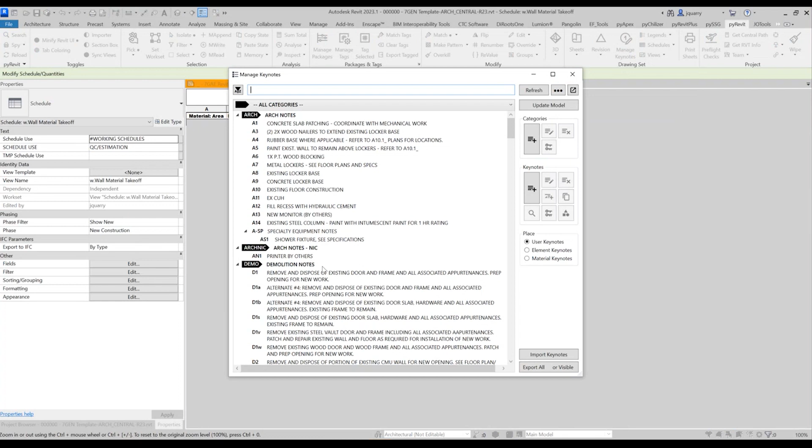Out of the box Revit, the management for the keynote file is Notepad. I use PyRevit because it allows multiple people to be in the same text file and edit it, and it keeps track of it just like Revit does. So it's great. If you don't want to use PyRevit, you can always use Notepad++. I just would stay away from Notepad because it is a tab delimited CSV type file, so if the tabs aren't in the right spots, you're not going to be able to access it in Revit.

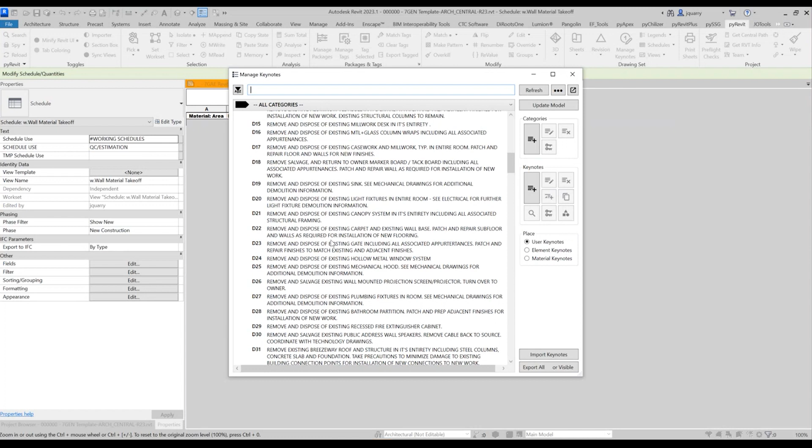So to touch on that, I think that would be good for PMs as it relates to project-specific demo notes or other keynotes. It allows them to work in Notepad++ if they're not comfortable in Revit. Yes.

But there's a lot of helpful tools in here. This make pattern one is super popular with the interiors folks. Not necessarily ours yet because they may not know of it, but whenever you need to create intricate patterns, this is the tool to use. It's really awesome.

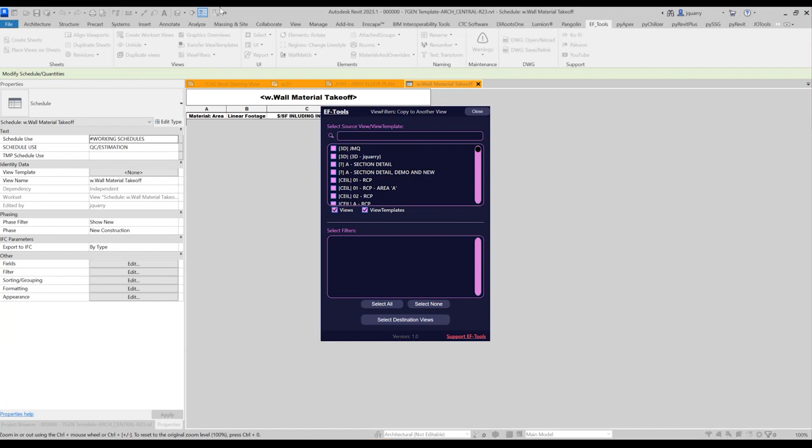Yes, there's a bunch of different ones in here. Some of them I haven't even used. You can pre-pick. Some of these other extensions, this EF Tools, people recently have seen the importance of this. With view filters, it allows you to copy filters from view template to view template, not just the filter itself, but also the settings for the filter. So if you've applied blue, hatch, halftone, pink background, whatever you did, it'll actually copy those over and you won't have to reset them or make them yourself. This is a nice one.

Some of the other things in this particular extension, aligned viewports—I've never really gotten some of these. I've tried to use a lot of these before, and I've never had really good luck with multi-tag alignment and all that stuff. I've yet to find one that's really good. But take a look through some of these if you have them already. If you don't have them, let me know, I can help you get them.

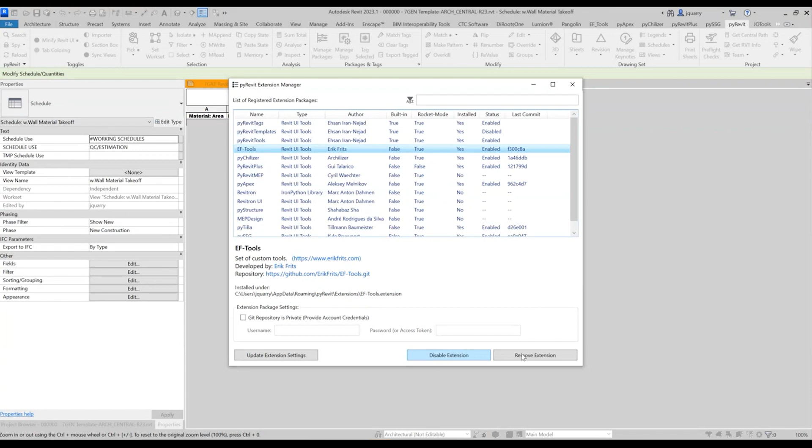Some of these other things, I've looked at them, there wasn't much in them, but feel free if you want to install them, you can just pick it here and install it. Although it helps if I actually pick one that isn't already installed. Like this guy, I can install it, send it to where it's going. Okay, so that's PyRevit and the extensions.

The other one is DiRoots. This one's got a lot of great tools. This is a completely free add-in. You'll notice I have this and CTC. Everybody should have the free version of CTC as well for two reasons: one is quick select and the other is renumbering. But there are some other tools in here that I really like and use on a daily basis, like Spreadsheet Link. It makes my job managing multiple families and multiple pieces of data and models quickly, and moving them from model to model, much easier. So highly recommended.

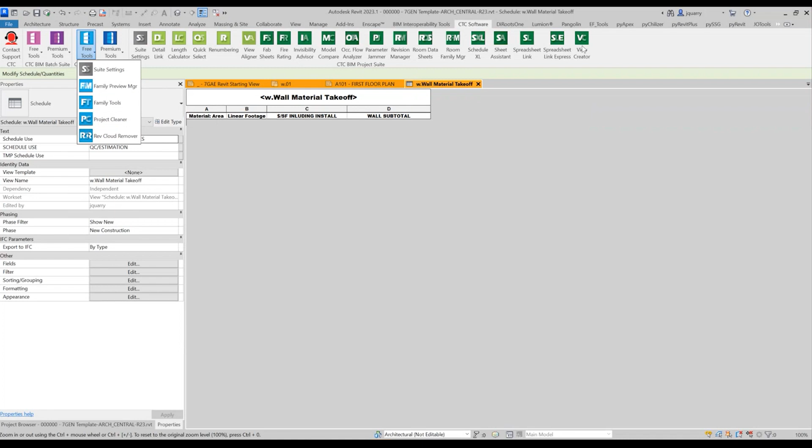There is a group of free tools and paid tools in both of the suites that you should have installed. DiRoots has a lot of similar features. Again, this is all free, and they claim they'll always be free, so that's pretty important. Enscape, obviously. IOTools is a big one.

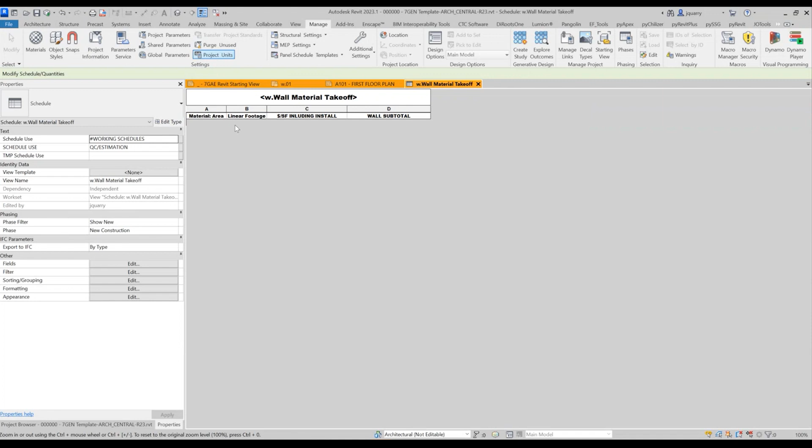This is the one where some of you may be familiar with transfer project standards, and if I do manage transfer project standards, it's a great tool, right? If I'm not in a schedule. But if I transfer project standards, what it lets me do, if I had two models open, is transfer a bunch of different categories from one model to another. The problem with it is it brings everything.

So if I go and do view templates, for instance, I'm like, oh, I need this one view template in this model, and it happened to be one of our old template models.

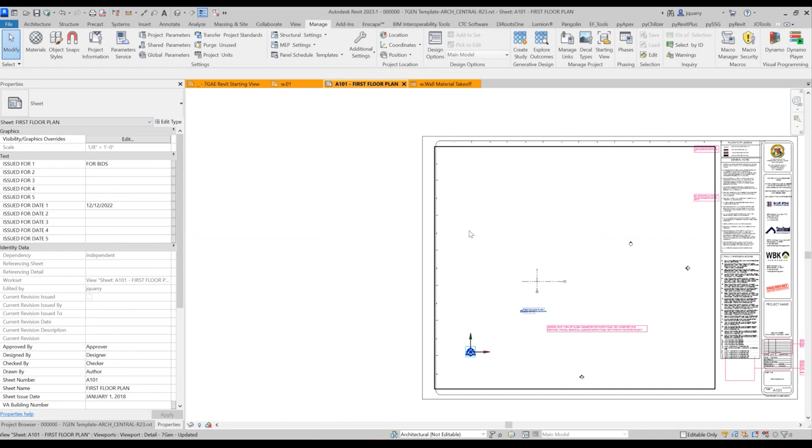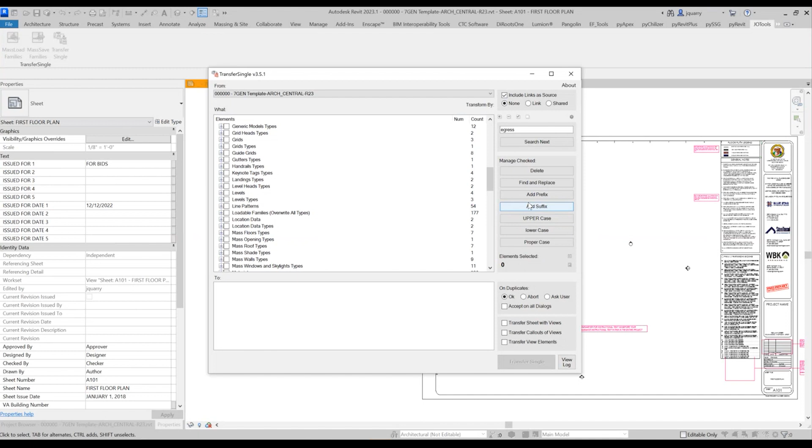You're going to get every single view template that was created in that model, and you don't want that. So if you use transfer single, you can easily pick individual ones you want to bring over. There's a whole slew of things you can bring over with this tool, some you can't even bring over with transfer project standards. This is a great one, I use it daily. Fill patterns, filters, view templates, there's all kinds of stuff in here. You can even change casing of things. It's pretty cool.

I think that's the majority of them. There should be 5 of them. Is that 5? 1, 2, 3, 4, 5.

Can you transfer project standards between a Revit 21 model and a 23 model, or is it just 23 to 23?

Yes, you can, giant asterisk. You would have to upgrade it temporarily first, but it can be done. You can open the model, let it upgrade, don't save it, transfer your project standard, send it back down. Now if you want to go from 23 to 21, can't help you with that. Can't do it, unfortunately.

And I'm glad you mentioned that, because the goal for us is to jump new versions as soon as possible, I guess, with a giant asterisk. As soon as possible doesn't mean the day it comes out. It means when I feel the first hot fixes come out, and a lot of other people have tested it and screwed up their own stuff, so they fix it first, and then I jump on board. The idea is we're constantly evolving. We want to be faster, more efficient, more consistent. We want the QA/QC process to be simple, easy, fast, and be confident that it works.

A lot of the tools Autodesk brings on a yearly basis and in major updates, .2s, .3s, .4s, are important. I can't even name enough features that have been added over the years that completely changed the way I started doing things back in the day, i.e. view templates. That was a huge one, hard to wrap your mind around, but it helped out a ton, and we're all reaping the benefits of that today.

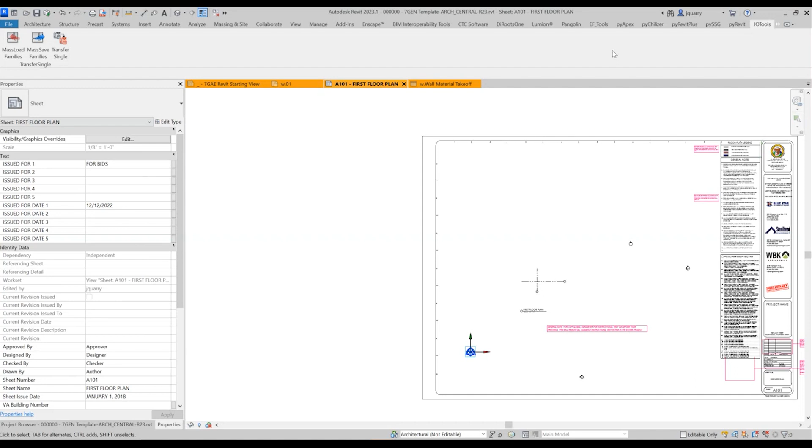It's worth talking about. Shane found out recently we agreed to adjust phasing in Revit on VA Clarksburg to accommodate a request of our MEP consultant. And in doing so, created a lot of rework for us.

With some of the phasing plans that you and I have experienced together on projects, I don't want to go down that rabbit hole in Revit, but I also default to Jason's thoughts and forward thinking because I still have PTSD from phlebotomy in One West when we get into 19 phased projects. It can be done, it just takes a good thought-out pre-plan.

Yep, perfect example, it'd be no different. It's very similar to Rosebud, or the Pokagon Health project, I think, that has several phases, Blackfeet, all those. It's just a very similar process.

You have to have a good understanding of how those phase filters work, and just know that you can't tell it to pick this phase and this phase and this phase, but not pick this one or this one. It's everything and before - that's the only choice you have.

Whereas when we did phlebotomy, we put it into AutoCAD and we were able to control our graphics the way we wanted to. However, you can't do that until the very end, otherwise you're now modifying your plan in two locations, which is a terrible idea.